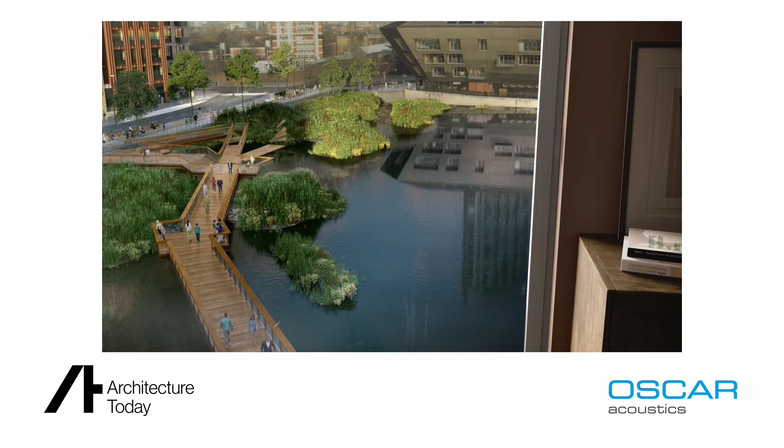This station, Canada Water. Change here for London Overground. My journey to work, I cycle so near Greenland Dock. Some days I look at the sun on the water and I think, what an amazing place. Canada Water has always been a pioneering neighbourhood, from Elizabethan market gardens to the proud history of the Docklands. The name is quite special because it relates to the history of the area - the timber that would have come from Canada, from Russia. What we're trying to do next is create the next chapter in this pioneering history of Canada Water. TEDI-London was really attracted to Canada Water because of the area itself. For our students, we believe in this combination of being close to the centre of London, to this hub of activity, but with a local community feel. We are currently in the paper garden, which is the creation of many hands of the community. Our vision in the future is to have pockets that are co-created with the community and looked after by the community, so that people can create homes and livelihoods here, and nature can be an integral part of that. We're looking to create one of the most sustainable regeneration projects in the UK. We're going to do this by enhancing the existing nature of the site, increasing biodiversity and ecological richness, looking at innovative ways to reduce carbon in construction and operation, and working with the existing community to enhance social connection, health and well-being. I think it's brilliant to be here at the start, bringing a lot of life, creating spaces where exploring, being creative. I think everyone who comes here discovers it - they didn't know it before and they want to stay.

I hope that played well for all of you and certainly has given you a bit of a taster for what this project's about. Would love to come and show any of you around the site, so do get in touch after this webinar and contact us, and we'd be delighted to show you around.

So what's it all about? Well, it is, we think, the UK's most sustainable new town centre. There hasn't been a new town centre delivered in London or much of the UK for quite some time. And when best to do it, other than coming out of a pandemic with everybody thinking differently about our urban environments, our parks, our homes, where we work, how we shop. It's really a unique opportunity to put all of that thinking into practice and create something fantastic for London.

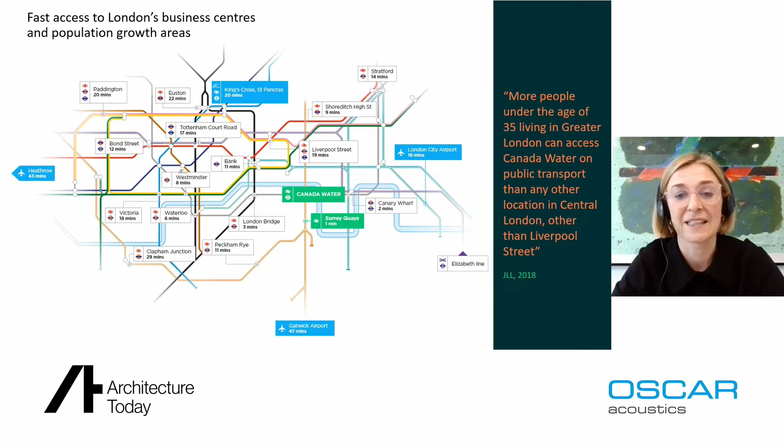South East London is still relatively affordable in London terms for people choosing where to live, and Canada Water provides easy access for those in southeast London to connect into the city and beyond. But it has got a backstory.

It might be a new town centre that we're delivering, but we're not starting with a blank sheet of paper. This part of London, known as the Rotherhithe Peninsula, was a very active industrial dockyard, where over 65% of the whole area was covered in water up until the late 1960s, with timber and food from North America and Scandinavia arriving to feed and supply the rest of London's trade.

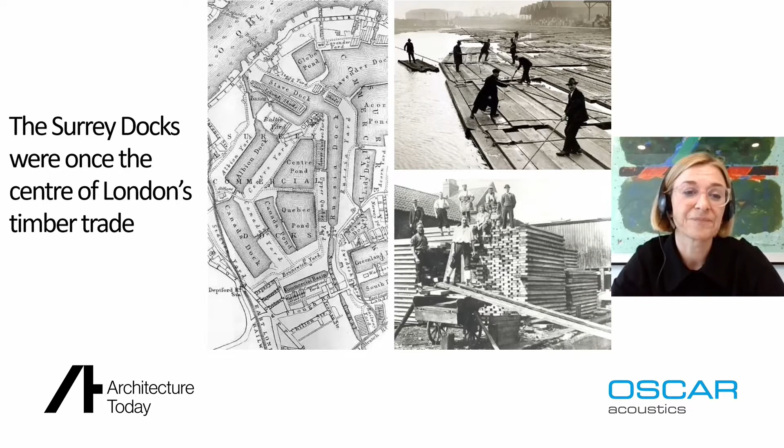In the late 60s, that closed, and the London Docklands Development Corporation, with the local authority, set about filling it all in. What they filled it in with was primarily green space, the legacy of which we now have to work with: over 130 acres of green space and remaining water bodies.

It's in an area that's incredibly central, two stops from London Bridge, but feels like it's miles out of town. From a residential perspective, particularly given the theme of health and well-being, having that quantum and scale of open space and water provides a perfect basis for a fantastic sustainable new development.

This is an aerial shot of the site today: 53 acres, about 26 football pitches in normal parlance, to give you a sense of the scale.

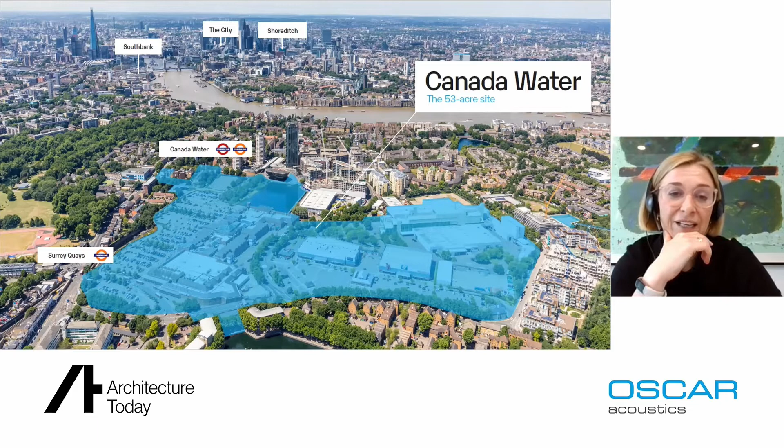It comprises a 1989 shopping centre that still looks in part like it did back in 1989, together with a number of industrial buildings and leisure boxes that you might imagine located much further outside of London. So a perfect regeneration opportunity waiting to happen.

When you're creating a whole new piece of city, places for people to call home, places for people to come and visit, work and enjoy, you're not arriving in a place that hasn't already got a backstory, as I mentioned, with its heritage as an industrial heartland. It's also home to about 30,000 people who live in and around it.

A development of this scale has to do its best to bring new development and new investment, but also to make sure that the people who already live there today feel and see the benefit of change happening around them.

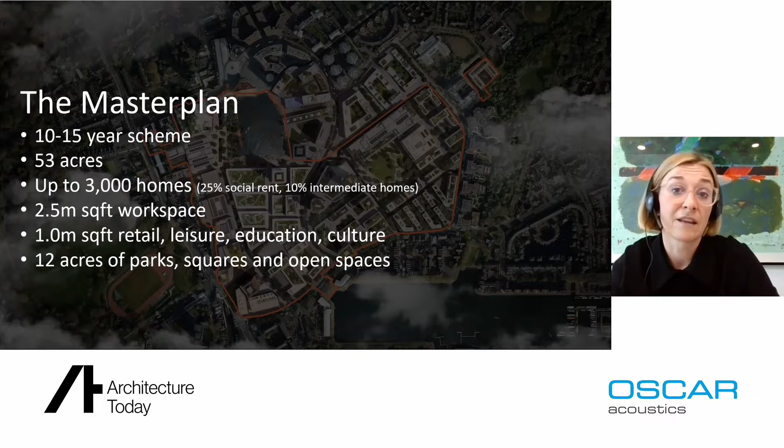So a genuinely mixed use master plan, which I think does make it different. There are lots of residential developments and new schemes being delivered all over the place, but they tend to be residentially led. I think Canada Water can be as much about living here as it is visiting or working. That kind of real urban living is what London needs more of - much more mixed use, rather than binary locations for certain uses, which just don't generate the footfall and activity to create the sort of environments we all want to enjoy spending our time in.

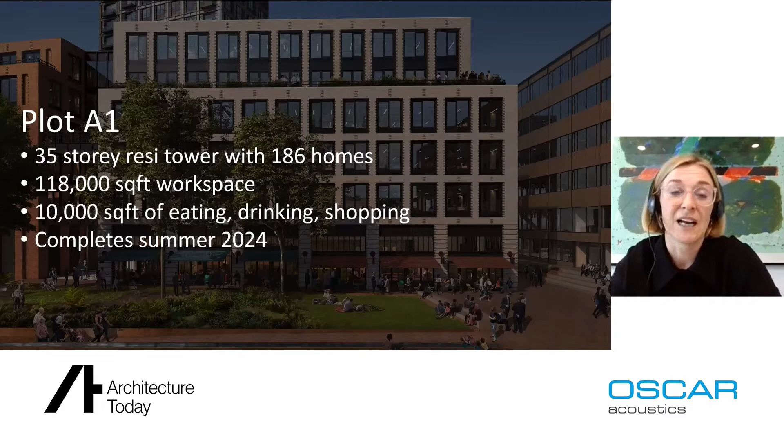The first building is on site. It's a residential and working office-led scheme, colloquially known as Plot A1, and that completes in the summer of 2024. The residential in this is for build to sell, but it's been designed with some of the facets of build to rent in mind. What I mean by that is many build to rent schemes talk about amenities, lifestyle, opportunities for tenants or customers to work in their building and enjoy the leisure amenities on offer. I think you can do that in a product for sale just as much as is often offered in buildings for rent.

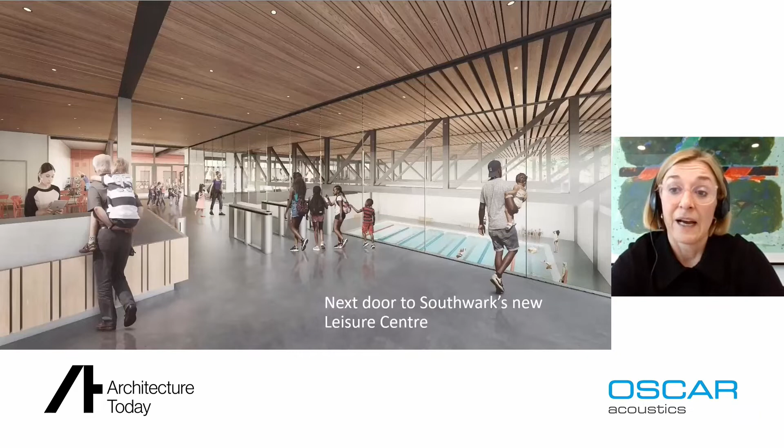In terms of air quality and noise quality, it's a very different kind of experience in which to spend time. Beyond the green spaces, the other key focus for us on Canada Water is around health - physical health, also mental health. In terms of physical health, we're delivering a new leisure centre as part of the first phase, with a deliberate intention on our part to design a leisure centre that is a public sector run initiative. It won't be a private gym put in the bottom of a residential tower. Moreover, it's an amenity available to the public, designed to the best quality standards. This is an image showing the entrance to the new leisure centre, which will be situated just next door to that tower we were just looking at.

And then the third site that is under construction at the moment is plot K1.

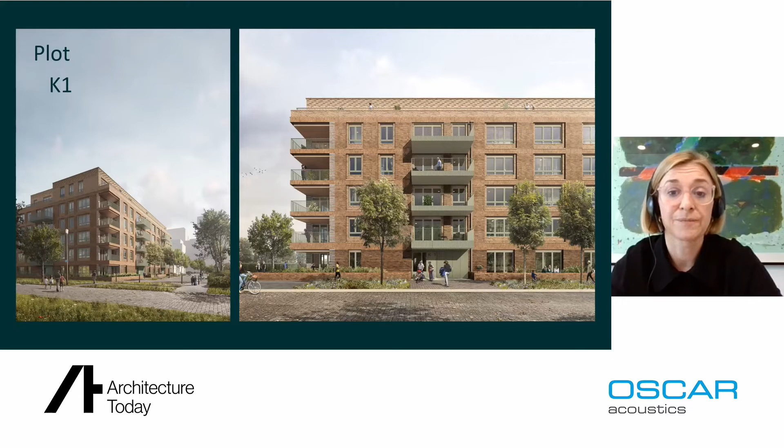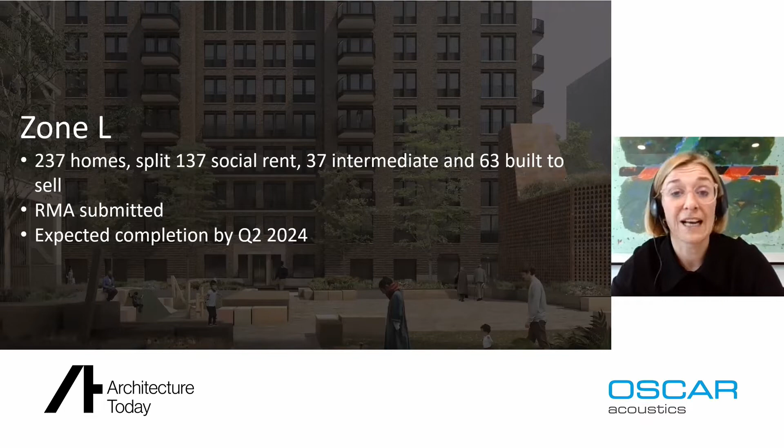What I've got is just a taster of some of the different kinds of product that will be delivered thereafter, more residential, in an effort to deliver ultimately up to 3,000 homes over the whole master plan. Zone L is in for planning at the moment - 237 homes split across a number of tenures, including social rent, intermediate housing and private housing. Wherever we can, we're looking to integrate mixtures of tenures within blocks, not because we have to, but because we see the real value in creating a mixed and balanced community across the master plan.

There is a very well-established local charity called Time and Talents. They are involved in helping us figure out how we design bits of the public realm so that they are accessible and welcoming to people of older generations, as well as engaging with local schools and different community partners who represent different age groups, in an effort to make sure we address the needs of different age groups and different levels of ability across the town centre.

We talked about smaller spaces, the dock and the bridge that we're designing and delivering. But then there are other pieces such as the new public park - a 3.5 acre park, which will be delivered in the second phase.

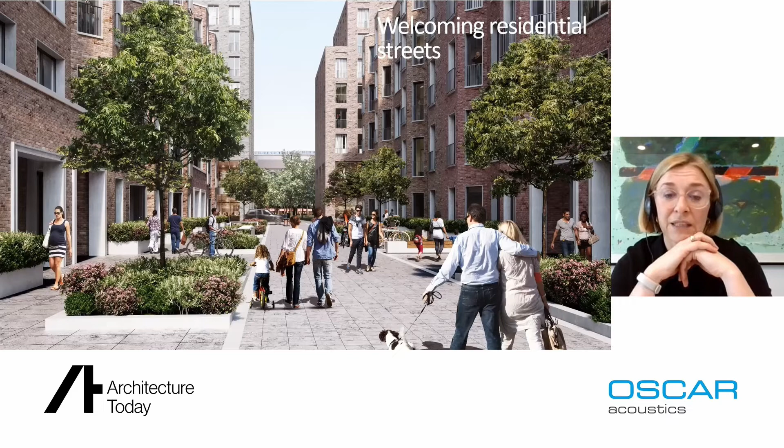This is an indication of a typical residential street, noting that active travel is at the heart of it. Pedestrian friendly streets are the default. Cycling ability is deliberately designed in from the outset right across the master plan, with a real reduction in the number of routes possible by car, in an effort to encourage that active travel.

And I think that is it from me, and I shall hand you back. Thank you very much.

Emma, thank you so much for that. You've taken a very broad brush approach to improving the quality of life for local people - not just providing public realm and amenities, but notably working with local charities to do pretty much everything: run food banks, improve literacy, provide training, careers advice. So how does this relationship play out once the development has been delivered? Are you able to maintain this kind of custodianship role within that community?

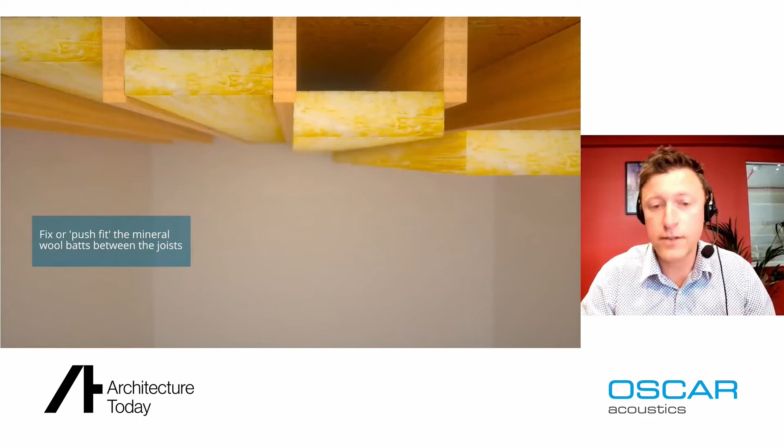So how to stop it? There's a number of ways to reduce noise between floors. You can remove the standard thermal insulation and swap it for well-fitted acoustic insulation. That's a good start. When using acoustic rock wool slab, improved performance can be achieved by leaving an air gap beneath to help reduce the vibration path into your plasterboard. Or replacing the existing plasterboard for something like soundblock plasterboard. That can help a little by adding 1 to 2 dB of performance, which doesn't sound like a huge amount, but actually is quite noticeable.

Impact noise can be reduced by using a dense carpet, specialist acoustic flooring systems, or acoustic foams. However, there are several reasons why these methods can be impractical or ineffective, not least because they all require access to the floor above. But if you can break the path of vibration with a quality rubber insulated acoustic isolation hanger, effectively creating what's known as a floating ceiling, this is by far the most effective and hassle-free solution. For the ultimate professional grade and cost-effective soundproofing, we invented the Oscar ISOmount.

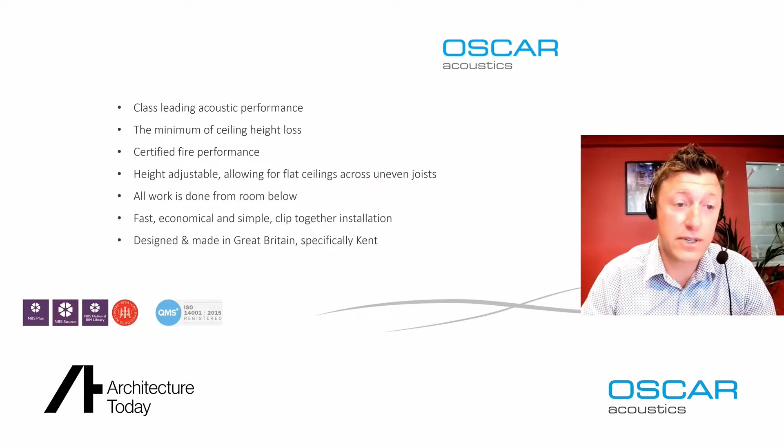Being an engineering company at heart, when we decide to design a new product for the Oscar Acoustics range, it needs to be significantly better than what is already on the market, solving all current issues. We decided to concentrate on a handful of points, knowing other benefits would follow: class-leading acoustic performance, minimum ceiling height loss, certified fire performance, height adjustability allowing for flat ceilings across uneven joists with all work done from the room below, fast and simple clip-together installation, and designed and made in Great Britain, specifically Kent.

This is the ISOmount Type 1, the first in the range of three. Taking the first point, ISOmount Type 1's acoustic performance comes from being attached to the side of the ceiling joist, but ensuring the vibration path is broken by the rubber block. This is therefore not directly connected to the ceiling channels and ceiling.

A huge amount of R&D went into choosing the perfect grade and shore of this rubber to achieve the optimum performance. On this image, you can see that with the rubber block in the center of the ISOmount, the ceiling channel is completely isolated from the L bracket on the joist.

This is where systems like Resilient Bar lose valuable performance. They may create a space in which to insert insulation and also give a degree of damping due to their spring, but they are a direct connection of noise and vibration to the new ceiling, meaning it's not truly isolated. They can also be problematic to fit without compromising performance.

For peace and quiet, the isolated ISOmount's the way to go, achieving better than compliance with British building regs Approved Document E for airborne and impact sound.

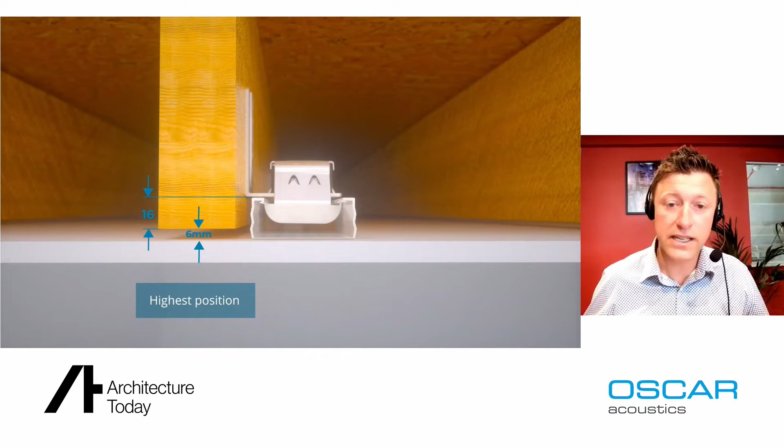Now, I mentioned that being height adjustable was one of our aims. Here you can see it in its highest position. The lowest position for the ISOmount actually achieves a 40 millimeter gap beneath the joist, allowing for plenty of adjustment when trying to create a level

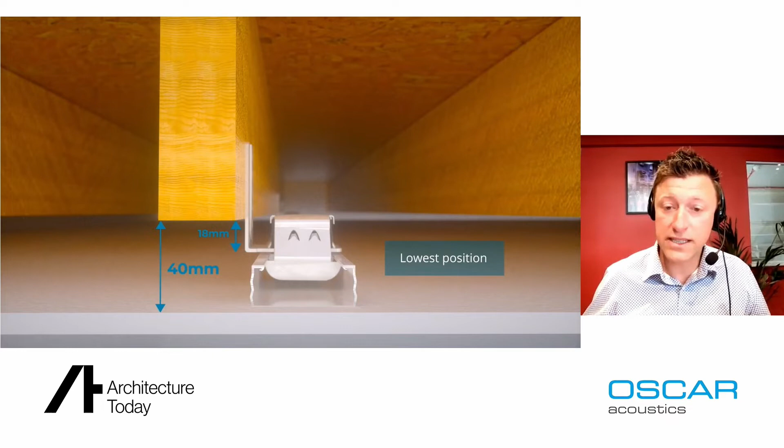ceiling across uneven joists. Wavy ceilings screwed to the underside of uneven joists are now a thing of the past. And for extreme adjustment, it is possible to locally screw blocks to the underside of the joists where the ISOmounts are required. More good news is that all the work is done from the room below.

Acoustic floor systems can be extremely labour intensive, as building up floor depth leads to skirting boards, doors and floors in rooms that don't require soundproofing, all to be adjusted and levelled.

If you're having a dispute with your upstairs neighbour, ISO mounts mean that you can also do all the work from the room below without disturbing their fun.

This testimonial is from another DIY installer called Jim. The whole transaction has been simple and easy. I fitted the ceiling this weekend and it's made an instant difference, so much so that I had to ask the owner of the flat above if he'd been using the room. I will recommend this product to my friends and will use it on other ceilings in my flats. Keep up the good work.

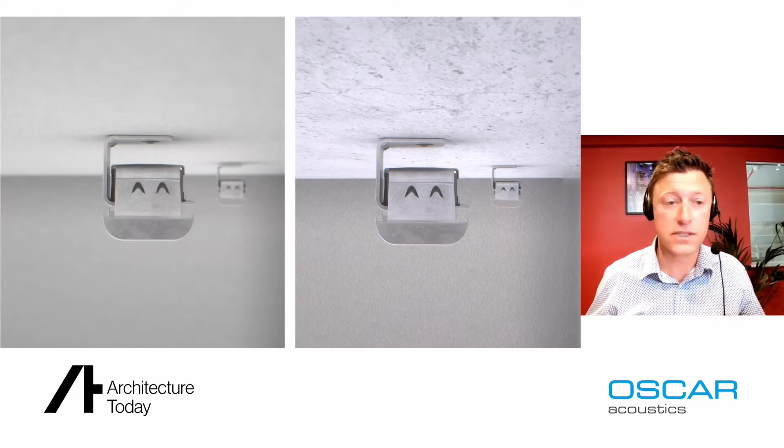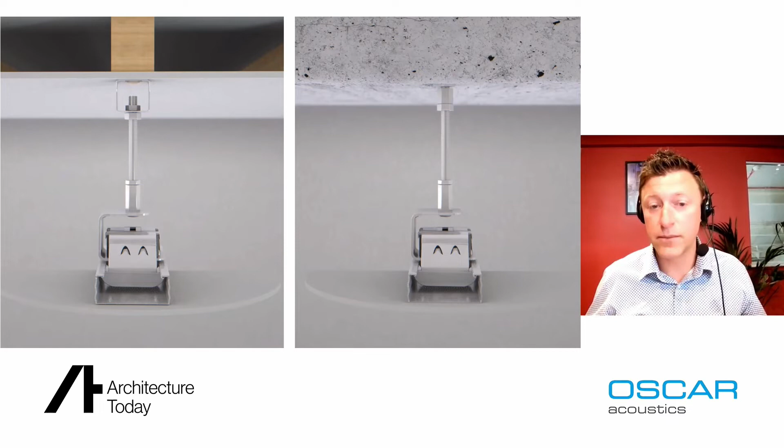As with Type 1, the channels clip quickly into place, this time giving you a 50mm void. Where larger voids are required, for example where you might drop a ceiling to encase a beam or where higher acoustic or thermal performance is needed, drop rods and fittings are available as kits.

And finally, ISO mount Type 3. This version uses the same components as Type 1 and is designed to provide a 100mm void, but with plus or minus adjustment built in.

You fix the first L bracket into position, and then the second L bracket is designed to slide up and down it. At any one time, 2 of the smaller holes up the sides will line up, giving a millimetre adjustment at a time. Once you have the correct height, just rivet the 2 lining up holes. This makes levelling with a laser extremely fast.

Once fixed in position, the rubber block and saddle is slotted into place, followed by clipping on the channels. As you can see here, like Type 2, it is also perfectly suited to concrete, and that inbuilt adjustment will help with levelling across the slab joints.

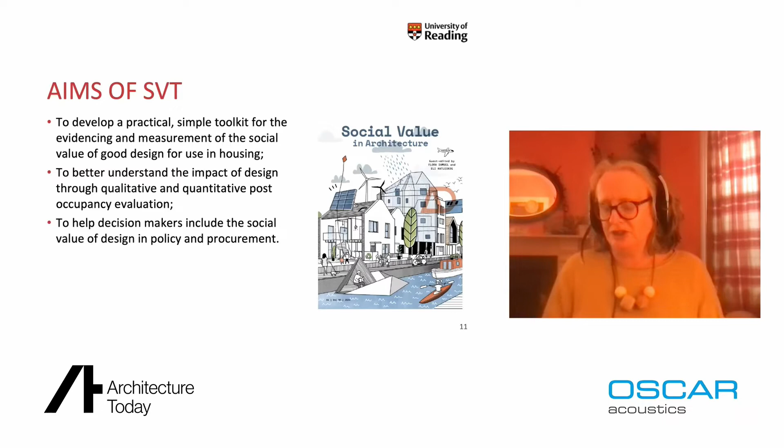So it started off with a workshop at HTA LLP with lots of social value experts. We did a literature review, a grey literature review of all the wellbeing literature to think what we needed to cover. We came up with these headline outcomes of things that were quite common to all the wellbeing literature, and the New Economics Foundation's 5 Ways to Wellbeing was very influential, I would say.

But we noticed that everybody tends to use different words for these categories. And the more that we can get clarity and agreement on what these categories are, the easier it is to start collecting evidence and rolling together big data on these things.

So we took these headline outcomes and tested them out with architects in practice and in universities to try and develop some post-occupancy evaluation questions. Once we developed those, we had pilot projects with a range of housing practices. These are examples of the kind of post-occupancy evaluation questions we were asking, and they may look very simple, but actually an incredible amount of work goes into them.

This thing, strongly agree to disagree, is a Likert scale, which is a kind of multiplier that you can use on these statements. In the Social Value Toolkit for Architecture, we discussed monetizing social value impacts using social return on investment. Now, I've become increasingly skeptical about monetizing social value, but we offered a methodology for doing that, should you be interested.

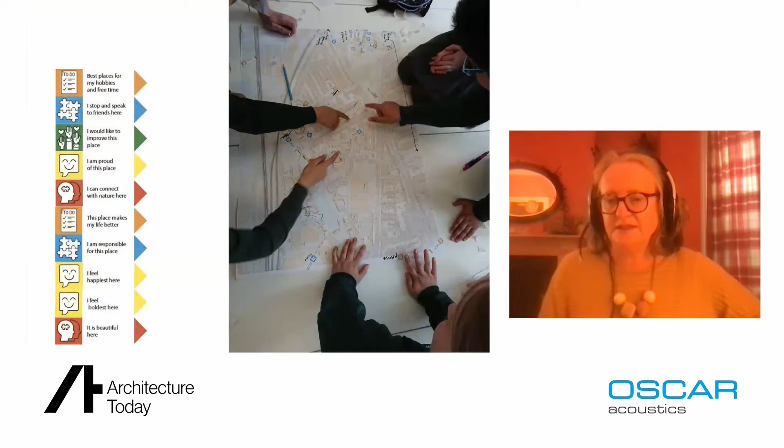So we developed a research project called Mapping Eco-Social Assets, and we were mapping with communities. Our case study was an estate in Reading, and we used stickers and writing, and worked with schools and churches and all sorts to find out what people valued in their area.

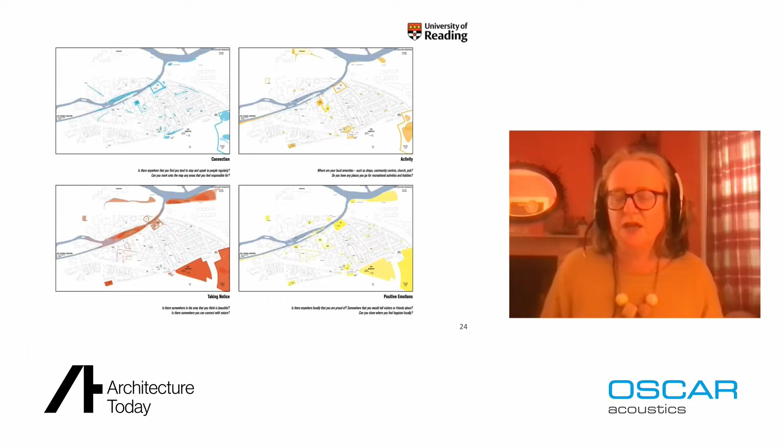We tested the maps back with people once we'd done them, and using the social value toolkit as a starting point, we came up with layers of where people felt connected, where they had activity, where they took notice of nature, and so on, where they felt positive. We developed these things that we came to call the happy maps, which are kind of heat maps of where people were feeling good, where they were experiencing quality of life.

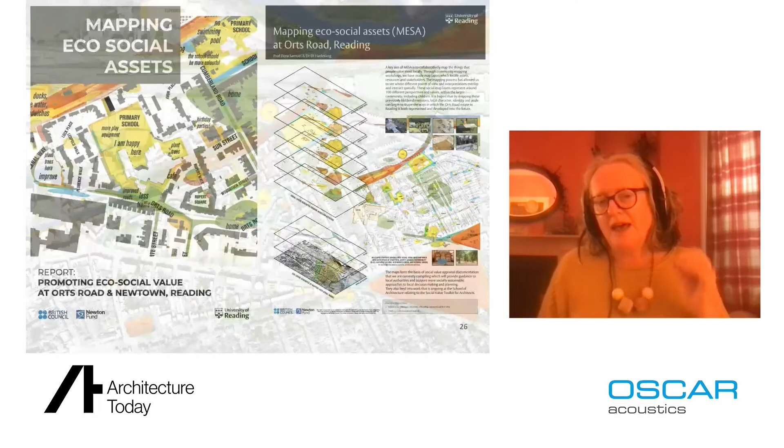Now, that was very laborious, and you can read all about it in this report, but it was very obvious that this stuff had to become digital, because doing the translation from the handmade maps took an awful lot of time, and you want to hit as many people as you can.

This was a concern of another project, the Better Places Toolkit, a project with Stantec, looking at how to get social value into the local plan stage, the point in planning when the local authority makes decisions incredibly important for the future of the area, but which are currently generally based on economic impact and sustainability. Social value is pretty much not there.

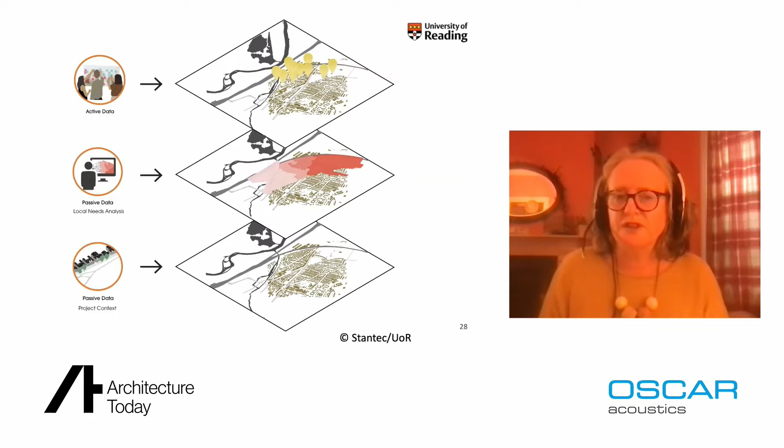With Stantec, we've been developing a technique called passive data mapping, using ONS data, the census, and GIS techniques to make maps of what's known about an area. If you put this together with the active maps we made in Reading, you get a very rich picture of what's going on, particularly overlaying topography, where elements of artificial intelligence can account for things like motorways or mountains being in the way.

So you can start developing a very rich value map of a place. The conclusion from these projects is that people enjoy working with maps. Social value must be spatialized, and social value maps have the potential to be very useful to decision makers, while being transparent and easy to understand. If you put a social map, an environmental map, and an economic map together, you start having an amazing evidence base for planning.

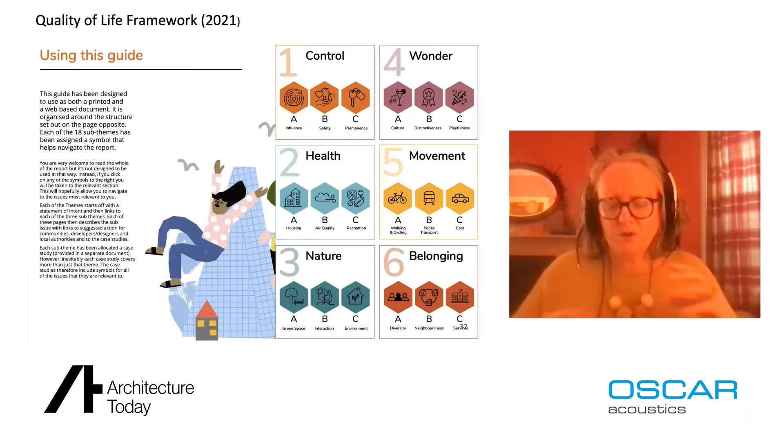A crucial element of this is participation. We've got another project, Community Consultation for Quality of Life, all about participation in planning. Instead of the Social Value Toolkit, we're using the Quality of Life framework, a framework for measuring quality of life developed by URBED with a lot of experts, constantly under review and changed as Quality of Life develops its offer around post-occupancy evaluation and so on.

This is an ongoing project, please go and have a look at our website. We're doing urban rooms, places for face-to-face consultation. We've just done one in Reading, we've got one coming up in Cardiff, one in Edinburgh, and then one in Belfast in September. This is a place for doing face-to-face consultation.

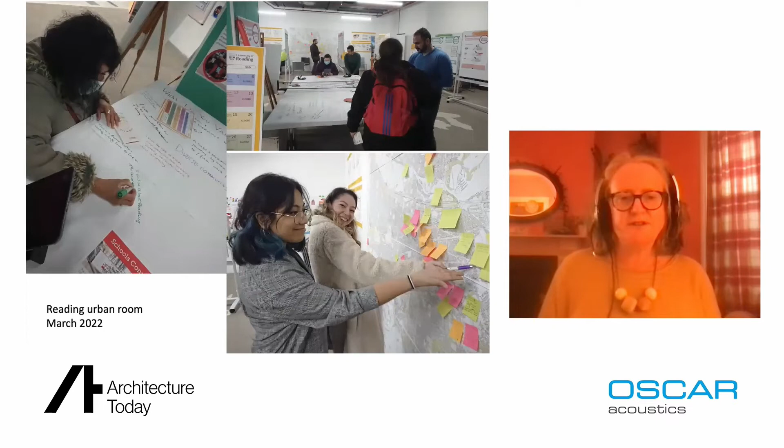We're using a digital platform, Commonplace, but face-to-face, so we can explain it or work through it with people who don't tend to use digital things. People also have opportunities to write and draw while they're at it. Ours was a very no-frills space in Broad Street Mall, opposite Poundland in Reading, but the no-frillsness of it enabled us to adapt and change as we went along.

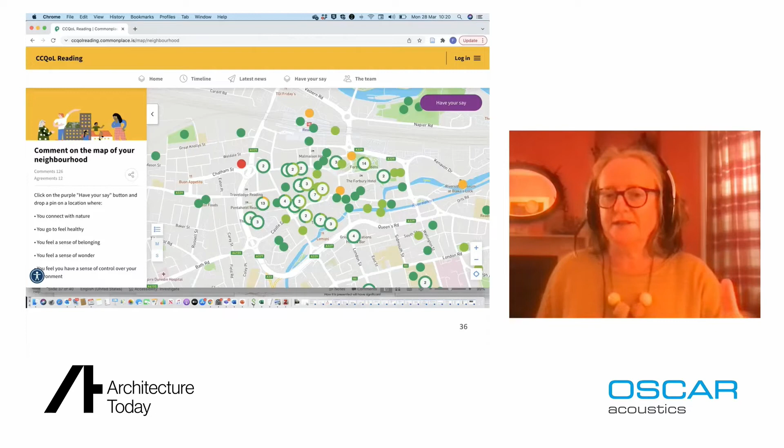This is a version of the digital map, and you see it build up with responses. We can make heat maps of where you connect with nature, where you go to feel healthy, these sorts of things. This was a remarkable experience. We got lots of people from all different kinds of backgrounds.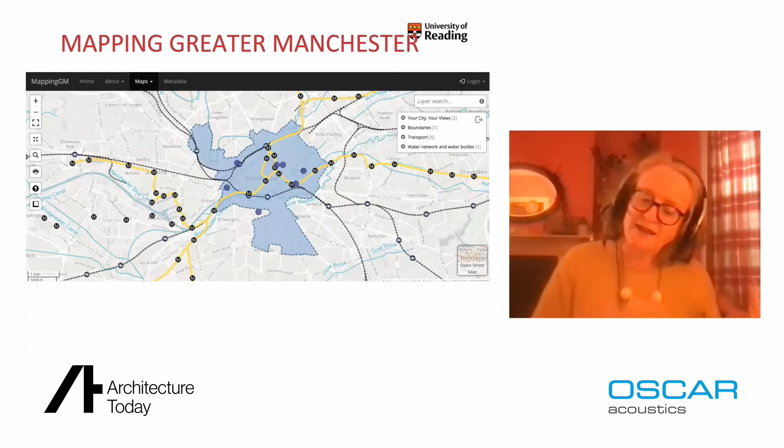Mapping - Greater Manchester has an amazing mapping site, all sorts of things happening in Manchester, but it hasn't been quite choreographed as yet. We believe that this sort of data that local authorities like Manchester can hold could be choreographed into social value layers, environmental layers, economic layers, to aid decision making going forward.

And this has implications for the transformation of planning that's going on at the moment, because there's a lot of talk about prop tech and coding outcomes into planning. Now, we argue this shouldn't just be about should a building be 3 stories high or made of brick or whatever. Places need to be coded for real-time environmental, social, and economic outcomes.

And planning should not be happening, the local plans should not be happening once every 5 years. They should be developing on an ongoing basis. And we need fluid planning. The pandemic just showed how urgently we need to be able to respond to situations fast.

So everything is suggesting that planning is going to become much more fluid, less rigid, less about plans from time to time. And we anticipate a moment where if we had social, environmental, and economic codes, then planners could make sensitive adjustments when they see overheating happening in areas - for example, over gentrification - you start building more social housing in that area, or so on.

So if this sounds far-fetched, you should go and read this book, Local Code, which is a very fascinating repository of ideas about coding places.

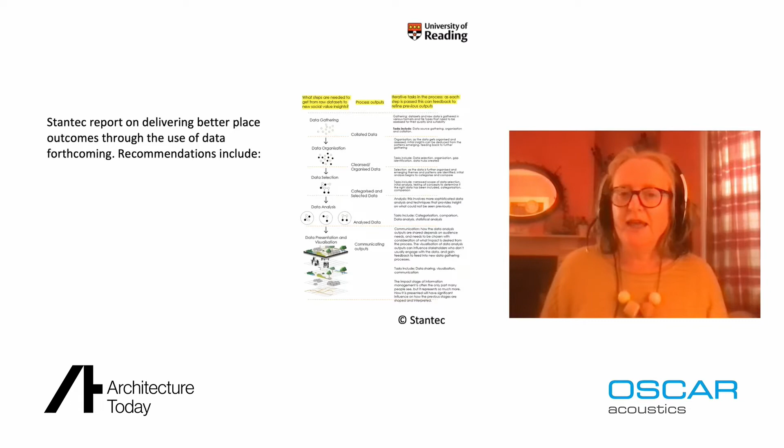So Stantec - I'm working with Stantec at the moment. We're developing a report on delivering better place outcomes through the use of data, and this should be out in a couple of months. We believe that we need a standardized format for digital maps. There needs to be a whole system view of data management across the built environment, and great improvements to interdisciplinary working. Fundamentally, we need to make data accessible and available and intelligible.

Communities need good data to know how to make decisions about their places. I've noticed in my work that small practices have a real problem accessing data because it's too expensive for them to access, so they are handicapped by that inability to work with data. But we generally need to develop better data about the relationship between people and places - all the things that have been talked about in this session, safety and well-being and so on.

So in conclusion, I would say it isn't really possible to improve quality of life in housing without collecting data on what really works. This data has to be qualitative and quantitative. It has to be passive and active. It has to be made with people and generated through Nectar cards, ONS, whatever, so that you bring the best of both worlds together. It must be straightforward and relatively cheap to collect.

So this is where automation comes in, and it must also be collected face-to-face and digitally. You have to give opportunities to people to give their opinion face-to-face. We discovered in Reading a whole raft of people who didn't have an email address, and their voices need to be heard.

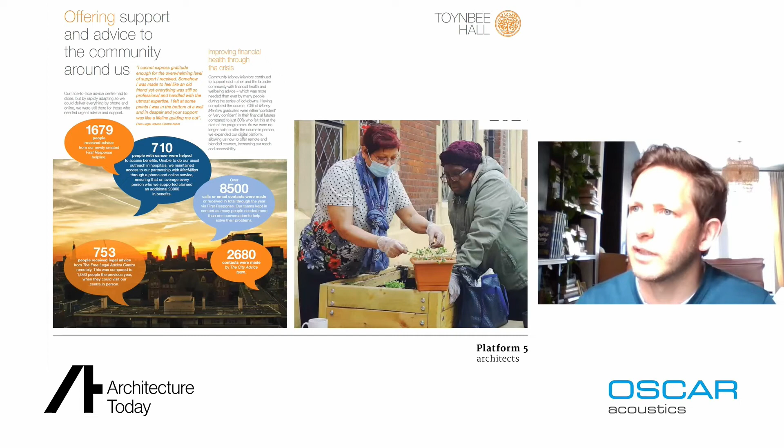The Grade 2 listed building Toynbee Hall was built on the site in 1884 and has been a focal point for the local community for over 130 years. So I'm just going to take you through a little bit of the history of the site and how that's fed into the master plan.

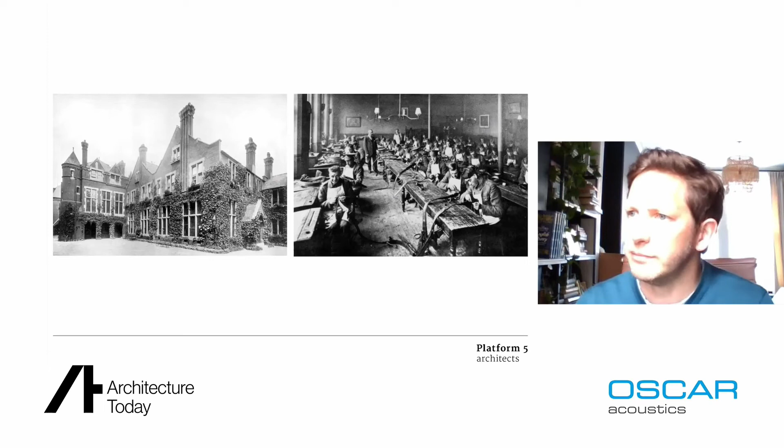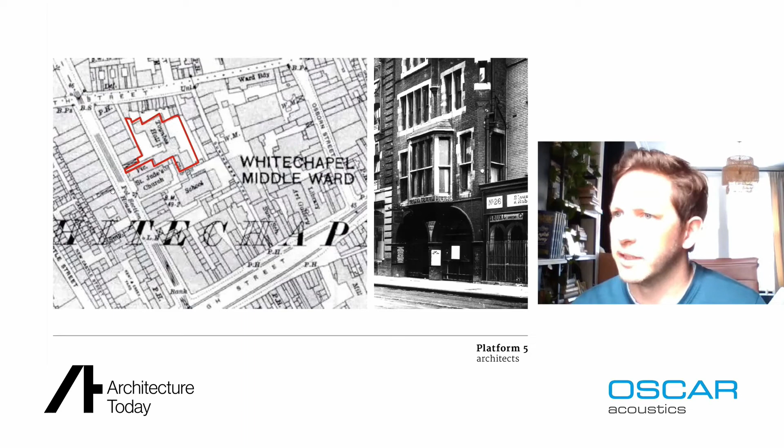So the original hall was set back within the city block. You have Spitalfields Market up in this corner, Aldgate East now down here, and Whitechapel High Street there. So Toynbee Hall sat in the middle of this urban block behind lines of warehouses and tenement blocks. The picture on the right is a view from Commercial Street, where you can see the buildings which used to front onto Commercial Street and the archway leading through to Toynbee Hall.

During the middle to late 20th century, new housing was built to the perimeter of the block, again with Toynbee Hall in the middle, and some office buildings were built along the frontage on Commercial Street. The new, rather unsympathetic block of housing encroaches on the view from the street to Toynbee Hall, and Toynbee Hall itself became less accessible. Mallon Gardens is not particularly accessible either, being set down at basement level with layers of walls and railings between you and the hall, and being a sunken garden, it has attracted antisocial behaviour over the years.

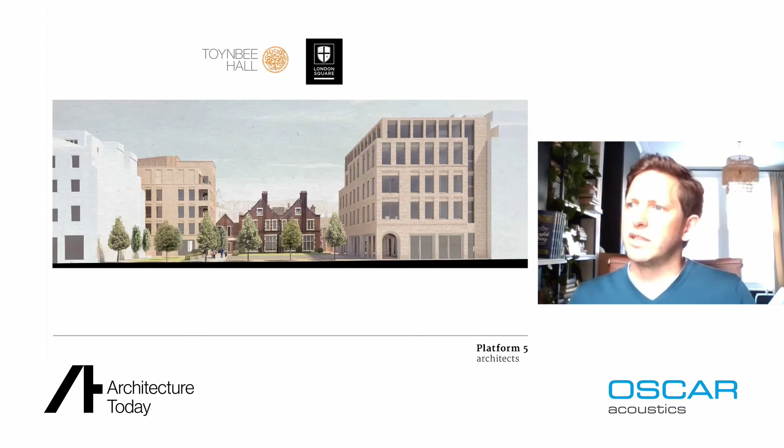At this point, Toynbee Hall, a Grade 2 listed building, was suffering from water ingress from the roof, with a lot of spaces becoming unusable and water damaged. It also had an estate of mid-century buildings which were not really fit for purpose - very cramped accommodation, very low ceilings, not providing the quality of housing or office space needed. So Toynbee Hall was determined to ensure its spaces would be relevant and valuable to local communities for the next 130 years, and set out on an ambitious plan to restore its historic home and develop new assets around a central community garden in a major redevelopment with a strong social purpose.

Toynbee Hall selected London Square, and this is how we entered the project. London Square brought us in as architects, acting as a partner in order to raise capital for the works which Toynbee Hall needed to do, and to realise part of the transformative mixed-use master plan for the estate, keeping the historic hall at its heart. Many other partners were involved - architects, contractors, consultants - and funding came from multiple sources, including the National Lottery Heritage Fund.

So we created this vision, a development of a master plan which was first conceived of by Richard Griffiths Architects. Richard Griffiths largely does historic work, and they were involved directly with Toynbee Hall doing the extension and refurbishment to the hall itself. We were brought in with London Square to design these contemporary buildings which framed the setting of the listed hall - you can see the buildings to the right and left of the hall itself. London Square also took responsibility for the re-landscaping of Mallon Gardens, which you can see in this visualisation.

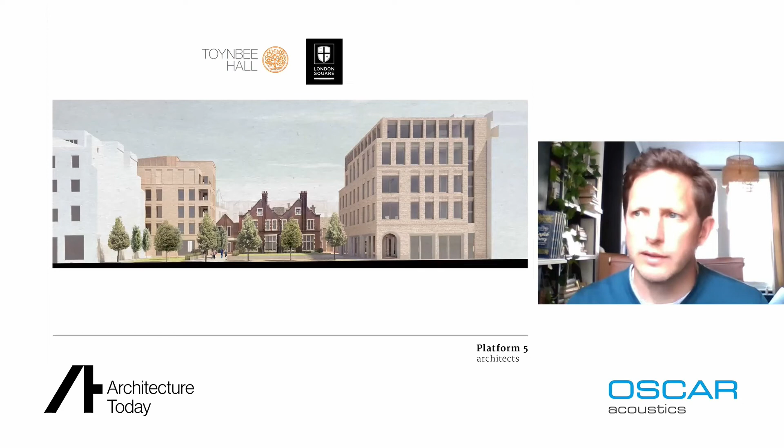So just to talk through the different components of the master plan, how they all fit together and come together to make this space work overall. First we have Toynbee Hall itself, Grade 2 listed, which was extended and refurbished by Richard Griffiths Architects - extended to the side and to the rear here. There's the Arts Admin Cafe, which continues to be on site here, and there's also surrounding theatre buildings and a primary school over here.

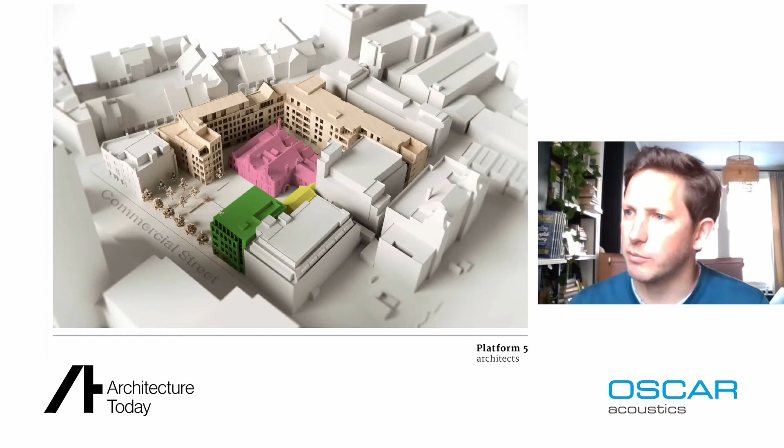In addition, as part of the Toynbee Hall buildings, this is a new build mixed-use building at 28 Commercial Street, which we were involved with. This was designed as a flexible mixed-use building with commercial space on the upper floors to provide long-term income for the charity. During the course of the project, it was decided that the Advice and Wellbeing Centre would be moved to the ground floor and basement of this building, so we were involved directly with Toynbee Hall on those elements, down to a detailed fit out for that.

To the other side of the site, this was the section taken on by London Square - replacement housing along Wentworth Street to the north and Gunthorpe Street to the east. This consisted of 63 units of high quality housing, 35% of which are affordable, and these are run by Peabody now.

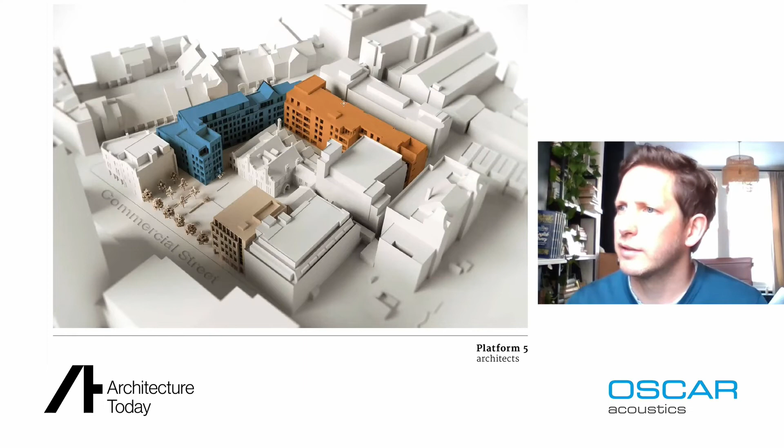So the big thrust of the plan and the original project to refurbish and extend the halls was to make the entrance here more visible, and to make the route there accessible and welcoming to the local community. This was part of the works by Richard Griffiths and part of the extension, which we can see on this slide - a new build element by them, which has some residential accommodation and further meeting rooms below.

Internally, there's some reconfiguration of the hall to provide better circulation, and there's two key grand halls within the space, which was refurbished. These are used for community events and also for conferences, largely for the charitable sector. So this was refurbished and the water damage repaired.

So to the housing, which we did with London Square as our client, reforming that perimeter block with some high quality housing, aiming to get good quality amenity space in, private amenity space, and doing dual aspect flats wherever possible.

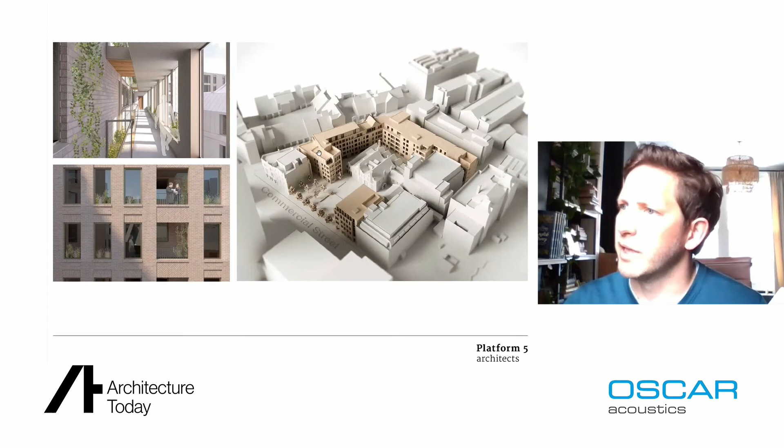So this forms a new perimeter block, which was about knitting into the existing street scene, and referencing the historic hall and the varied character around there, which is dominated by Victorian warehouse buildings.

Along Wentworth Street here, you can see the north section of the site. It's predominantly brick housing that we've done here, with an element of red sandstone to form that transition from the retained facade of this red brick part of what was known as East College, also keeping the vertical rhythm going through, picking out elements of the roof gardens and winter gardens and balcony spaces with reconstituted stone, which picks up on some of the details of the hall and the Culpeper pub on the corner.

And we've achieved an extra 2 stories on this section of the block, using cutouts and layering to minimise the impact of the additional height on the street, knitting in really well with the general height and character of the area.

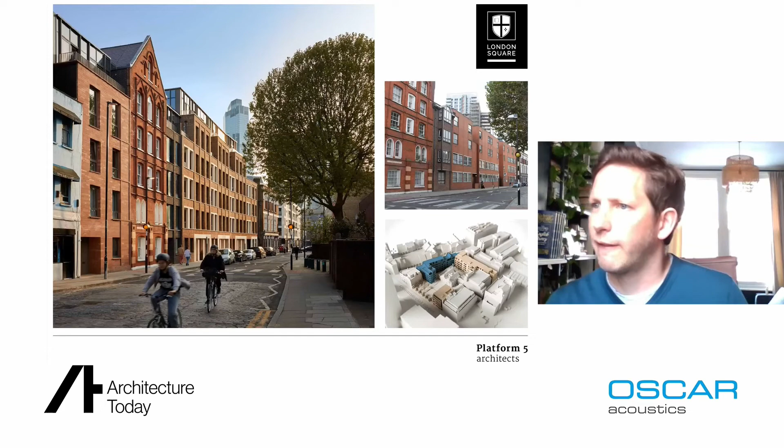So we took a playful approach to materials on this facade. The facade was part of College East, which used to stretch along Wentworth Street. This was originally retained in the 1960s when the new housing block was built, and then we re-retained it as part of the new development.

I think this is part of the continuation of the heritage of the site, which was really important to the clients and to us, and how it knits into the master plan. So we felt it really important to retain these elements.

And so to one side we've got the red sandstone, a darker brick forming a recessive break, and then you can see the balcony and winter garden spaces behind the colonnaded frontage and winter gardens within this block here.

To Gunthorpe Street, to the east of site, which is a quieter street, we went for a more theatrical approach with deep overhangs and projecting balconies, so there'd be more interaction with the street where there's limited natural overlooking.

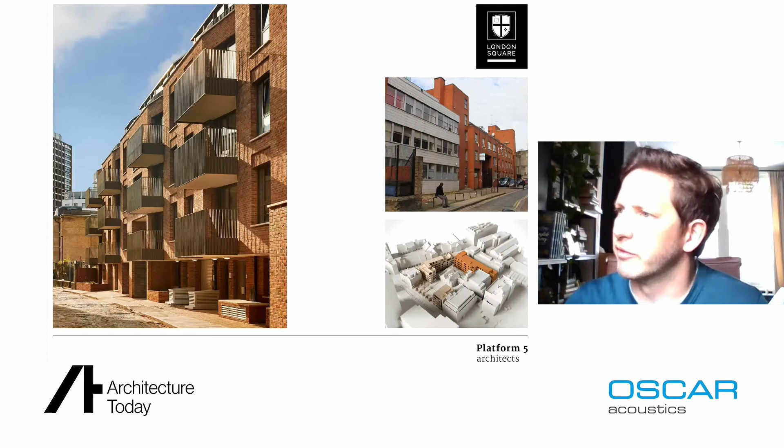And again, we're replacing some rather tired buildings, with limited headroom, very poor condition, and cramped layouts, so it wouldn't really have been feasible to retain these and work with them.

So this is the commercial building facing onto Commercial Street, which runs down here. This is back as part of Toynbee Hall's buildings.

So again, we related this to the development as a whole with the red bricks, slightly redder than the housing this time to relate more strongly to Toynbee Hall, using nice setbacks and layers of string courses and brick detailing, again to tie in with the verticality of the historic Toynbee Hall, and to relate to the surrounding buildings.

One element we've made is historical references, putting the arch on here, which echoes the arch which previously gave a route through from Commercial Street on the demolished buildings.

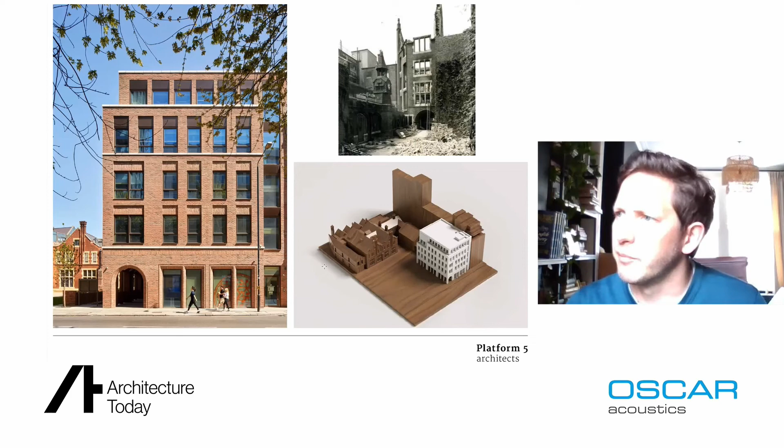And then this feeds into what the ground floor and basement are used for. These are part of the Toynbee Hall's Wellbeing and Advice Centre. So this route frames the entrance to Toynbee Hall.

It's colonnaded to give that collegiate feel to the entrance. Toynbee Hall's got historic ties to the Oxbridge colleges, so it's a little nod to the quadrants and cloistered routes found there.

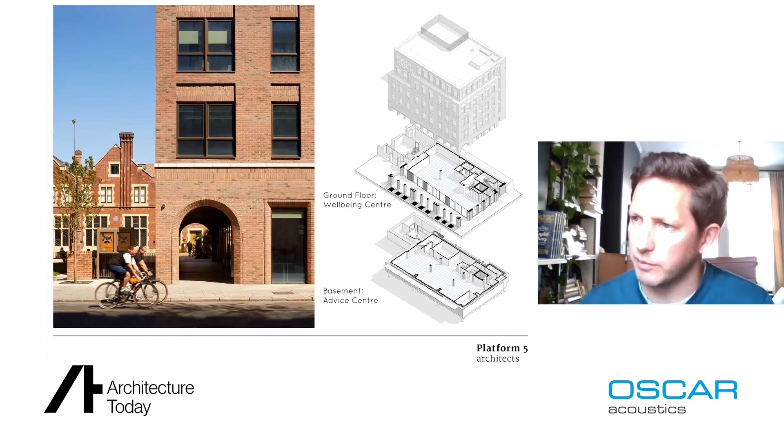So the basement was reused from the previous building's basement, and the ground floor has provided the Wellbeing Centre and a much more direct presence for the charity on the street, giving it a shop front and a very welcoming entrance, something that's physically closer to the community, giving it a much stronger presence within the street.

So the Advice and Wellbeing Centre is split across the 2 floors. At the entrance reception here, you can either go down to the Advice Centre or turn left into the Wellbeing Centre, which is designed as a flexible event space, so it can take quite high capacity.

So the charity offers all sorts of things here, from craft workshops, movie nights, dancing, singing around the piano. It's a very busy, well-used part of the estate as a whole. This has a visual link onto Mallon Gardens in the external space.

Down in the basement is the Advice Centre, and again this is part of the heritage of Toynbee Hall. Very early on, back in the 19th century, they were providing free legal and financial advice to help disadvantaged people in the local community, key to alleviating the effects of poverty and lack of information.

So we're involved again with detailed fit out of this. With a fairly limited budget, we try to apply materials with maximum impact, and as part of the Advice Centre, it's key to get the lighting and acoustics right. These things can turn a building unusable very quickly if not addressed, so even though it's a relatively small project, we brought in consultants to help.